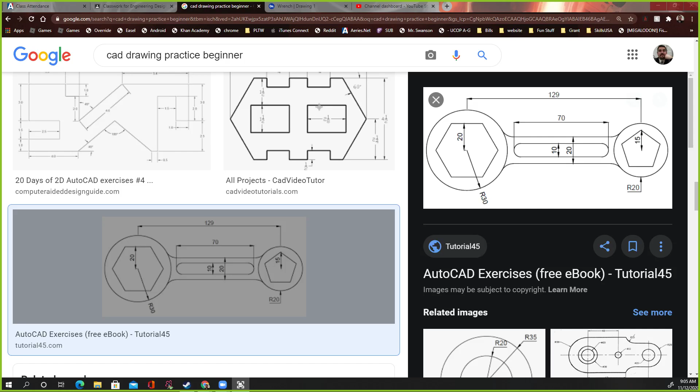So if you look at this piece, it's 2 inches this way and 1.5 this way. There's a piece missing, but we'll worry about that later.

So you can go to Onshape, click create, start a new one, and we'll call it homework for now.

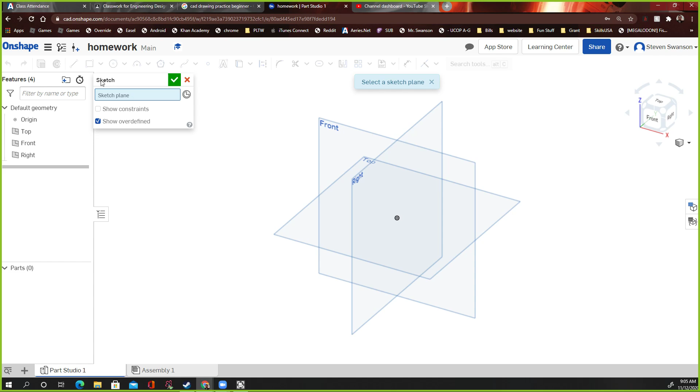Then you can start by drawing a sketch, on the bottom right here. I'm going to technically use the top view here, and draw that rectangle. Start at this dot as you always should. It's in inches, which is good, and this one is 2 inches, and this one is 1.5 inches.

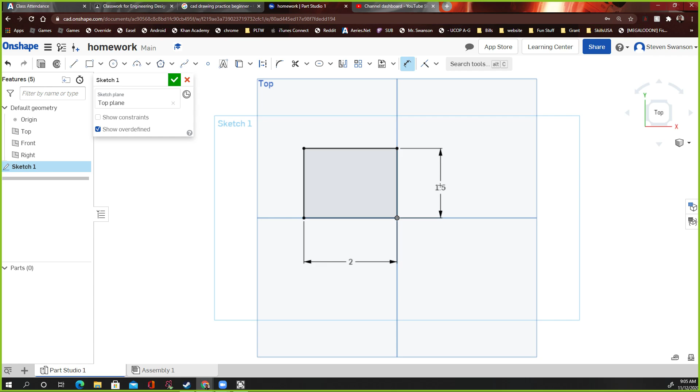Then I'm going to finish, switch back to the isometric view, and extrude up. How high do I go up? That's one thing I didn't look at. It shows right here, a 1/2 inch. So let's go back to this and say 0.5, not 1 inch.

There we go. And then I need a hole cut out right here. I could do that now or later, it doesn't really matter. So let's decide which one we're going to do.

I'll go ahead and draw this top block now. This top block is up 1 inch, but that's from the bottom. So notice it's actually 1.2 inches up, all the way to the top. Look at that, I didn't even see that.

But remember that I've already drawn a 1/2 inch on the bottom already. I already drew the whole base. So it's 1.2 minus a 1/2. That's how high I have to go up.

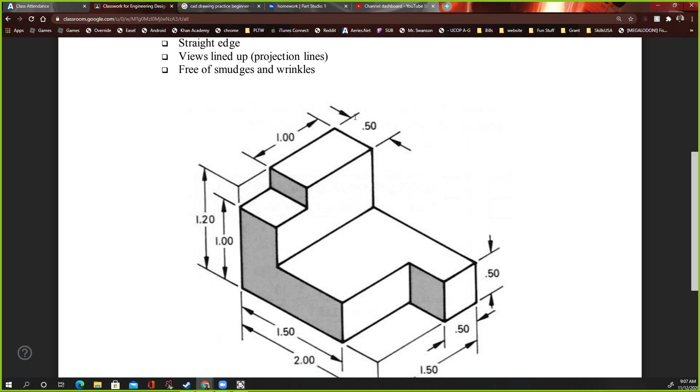Now let's look at the shape of this thing. It's 1/2 this way, by the whole thing, which was 1.5. Remember, the whole thing is 1.5 right here. So it's a 1/2 by 1.5.

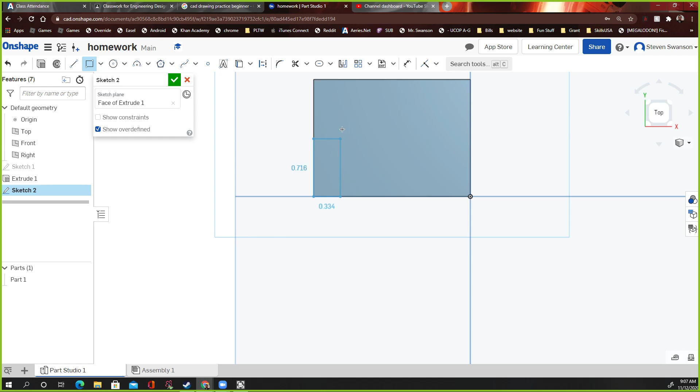So if I go like this and say sketch, and click here, right here I'm going to draw a rectangle. Start in the corner right there, that little dot, and go ahead and click that edge. Then use the dimension tool.

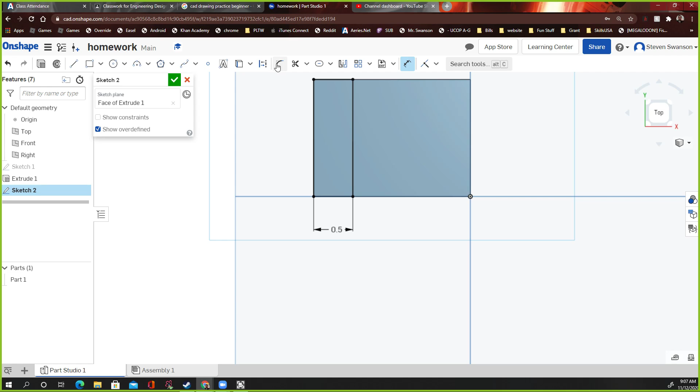I believe that this was 0.5, let me check that one more time. Yeah, it's 0.5 wide, this way is 1.5. But I don't need to dimension it because I already clicked both sides of the wall. If you don't believe me, we can click this, and it'll say it's 1.5, and it'll be light, meaning I can't change that since I clicked on the edges already.

Then if I click finish, and go to isometric, I can extrude it up. How far? Well, it was 1.2 inches, but minus the 0.5, because technically I built it on top of this base, which was a 1/2 inch thick. So it's 1.2 minus a 1/2.

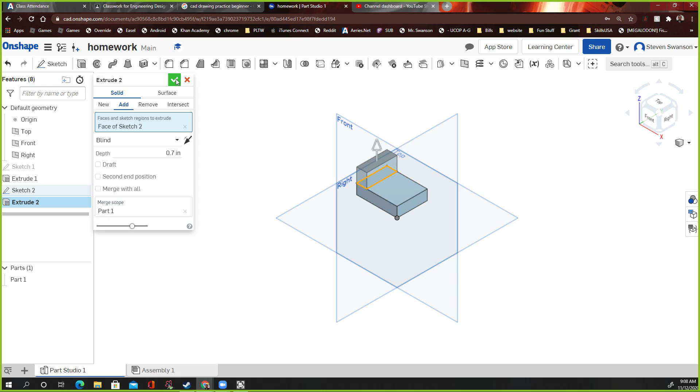So I did it right here, I do the math here, and it will do that. And there we go. We got the main shape of it now. So I got the main shape.

So remember, that was 1.2 high, but minus this fat part. Remember, I already built this bottom, so I subtract this 1/2 right here. Now we just got to take this piece out and take this piece out. Doesn't matter which first, so let's take this piece out first.

How wide is this piece? Well, this is 1.5, and this is 2, so this leftover must be a 1/2 inch. And this way, how wide is that? Well, this is 1.5, and this is a 1/2 inch, so this must be 1 inch by a 1/2 inch.

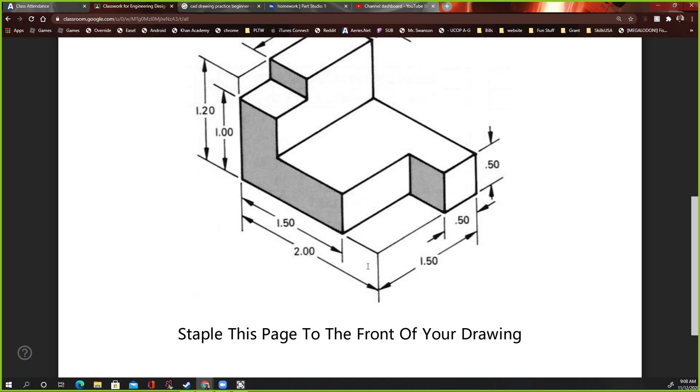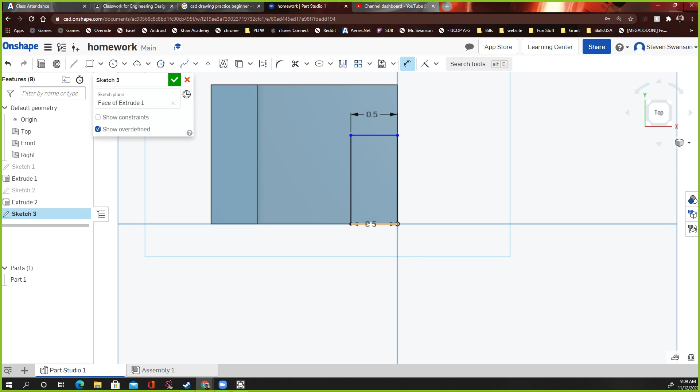So let's do that. Sketch right on that surface, rotate around, click rectangle, click that corner, click that, and let's get those dimensions. It was 0.5 this way, and from here to here was 1 inch exactly.

And then finish, go to isometric view, go to extrude, click this, click remove, and then click the check mark. There we go.

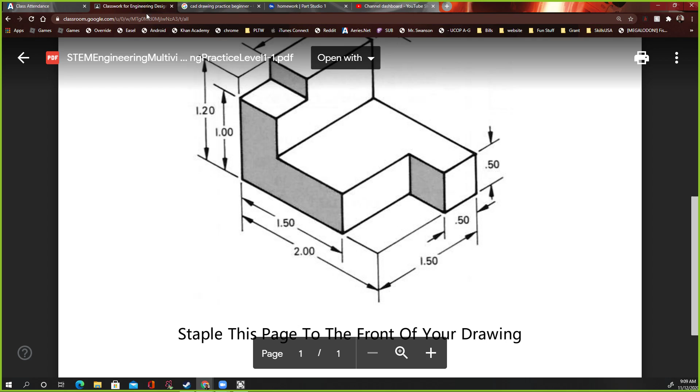Next we got to remove this piece, and I can remove it from the top or from the side, it doesn't really matter. So I can draw the top part and extrude downward, or draw the side and extrude through. I noticed that this is 1 inch here, so I'm removing 0.2 inches because remember it's 1.2 inches.

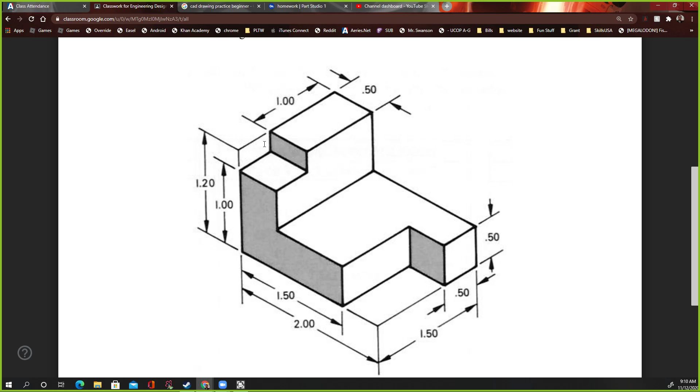So how big is this shape right here? Let's see, this is 1, but the whole thing's 1.5, so this is 0.5 by 0.5. See, here's 0.5 here. So I'm drawing a 0.5 by 0.5 and extruding downward 0.2. I'll just do it that way.

So I'm going to sketch on here, rotate that view around, and click here, click that corner, click that wall. That wall means I don't even need to put this 0.5, it's already there. But I do need to say how far it is from here to here, and I have to say 0.5.

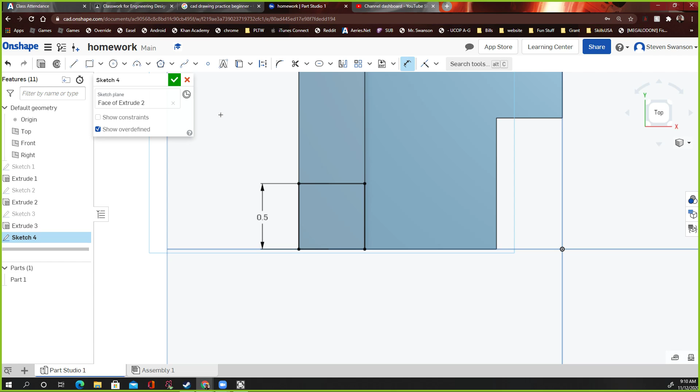Be done with that, rotate around and extrude. Click here, say remove, not 1 inch, just 0.2 inches really is all I need. See, 0.2, then put OK, and I'm done. That's all there is to it.